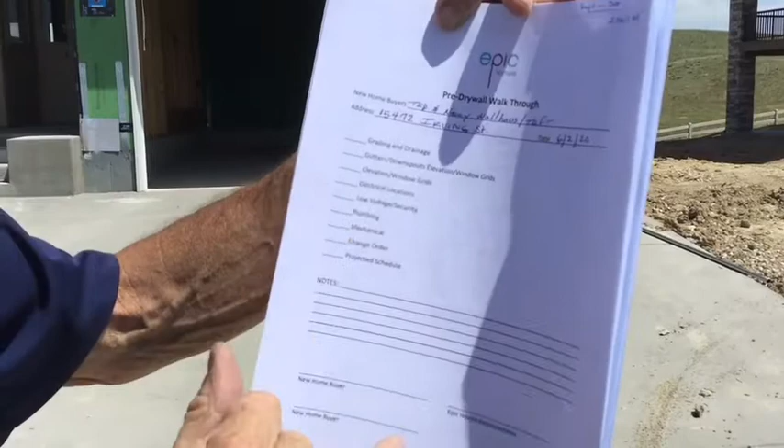Something happens in every house every day, so today what's happening in your house is the pre-drywall video. I have this little checklist that we use, and we're going to be talking about many things today: grading and drainage, gutters and downspouts, elevations, window grids, electrical, low volt, plumbing, mechanical, change orders, and then the projected schedule. So we'll be covering these areas.

We have the siding installed, and after inspections this week, we'll be starting the masonry work, the stucco and the stone. Now that may not happen exactly next week - there's a couple of houses in sequence ahead of yours, but within the next 2 weeks we'll be setting scaffolding to do all of the stucco and stonework on the exterior.

As you can see on the exterior, anything that still has the green cladding or green board is our wall sheathing, where we have yet to install any masonry product, whether it's stone or stucco. We leave every soffit open, everything open, for the inspectors to see every bit of wiring, framing connectors, draft stopping, making sure I get all exterior penetration sealed. So there's several areas still open, but that all happens in correct sequence, along with and in front of and behind the masonry applications.

So here we are, modern prairie elevation. You've got 3 garage windows on the single bay, the entryway, and on the modern prairie elevation there are no window grids. This being the exterior of a modern prairie elevation, I'm going to pull the garage door down so you can get a sense for what the front facade and the windows look like in the garage.

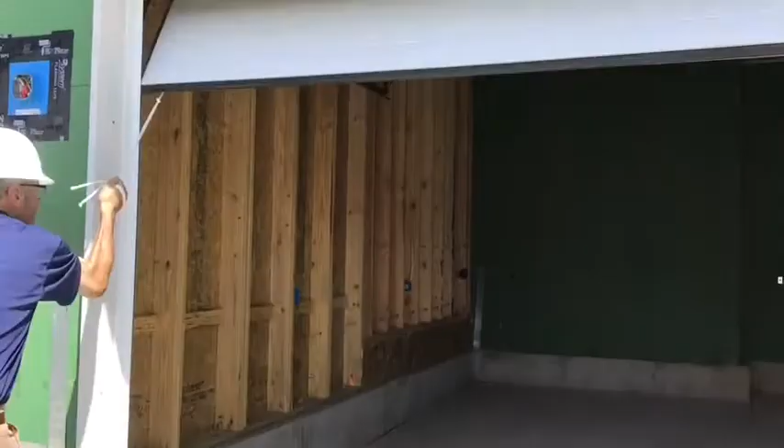These are the garage doors for the modern prairie. There are no grids in the garage door windows either.

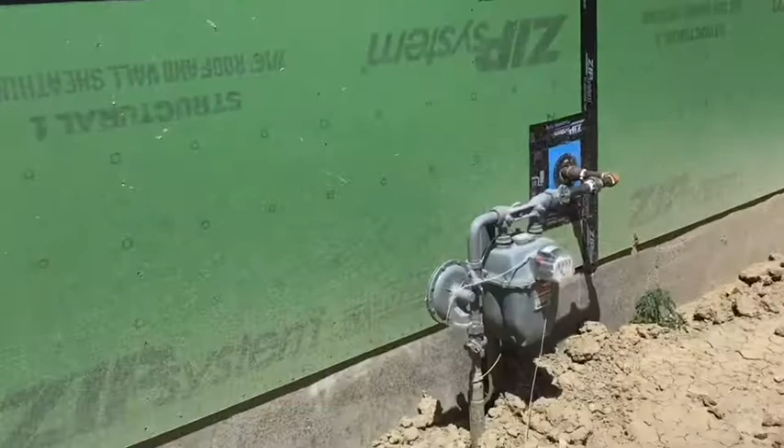So as we move around the outside to the south side of your home, the garage side, you come down and can see everywhere that's green, like I mentioned, will be masonry, whether it's stone or stucco. This is our main gas meter, gas going into the garage - we'll show you that in a few minutes. We come down this side of the house.

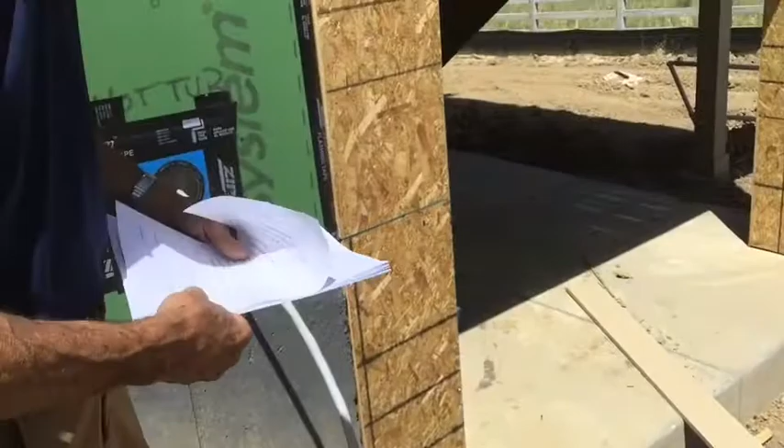Got a hose bib located here, and this is a bedroom window in the basement. We have a 110 outlet here for your request, and then this is the hot tub pre-wire, which if you're going to put it on the patio, that'll connect right to this disconnect that we mount here. We've got a retaining wall built and installed here, and that's to provide required drainage.

Something I failed to mention up front is this is a picture of the plot plan, and it has all kinds of information on here, but it shows the footprint of your house, the outside of the foundation, and the retaining wall right here, which I'd hope Craig had talked to you about at contract and given you a copy of. If you have not gotten a copy, please request one and we'll get it to you immediately, whether Craig or Kyle sends it. And if there's any other documents you need, please just ask.

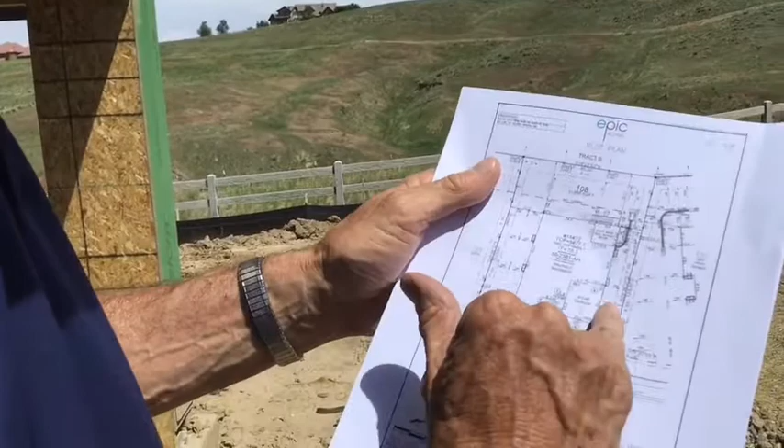This also provides us with directional arrows on how the drainage is going to work on your lot. You can see in the rear here, all drainage is designed to go to the back fence line and off into the open space. Off the sides of the houses, we have to maintain the drainage percentage of slopes that are stipulated, and those will be certified at the end of the construction period. This is your lot perimeter, your house footprint, and all kinds of drainage dimensions and slopes of grade that we need to maintain.

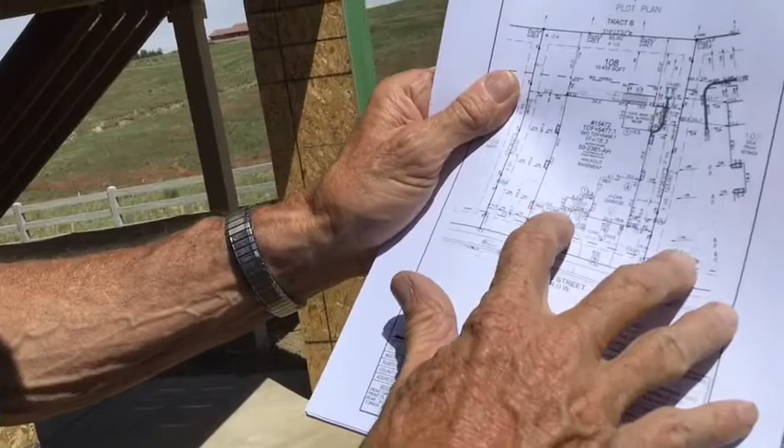This little stop sign figure that you see on your plot plan represents the number of steps into and out of the house. For example, at the front porch we're coming up 3 steps, and then there's 1 step into the front entry. From the 2-car garage, there's 4 steps up into the owner's entry. In the 1-car garage, there's 3 steps up into the owner's entry. At the rear, you step down 1 step to the patio, up to the deck, and then there's 17 steps from the upper deck down to lower grade.

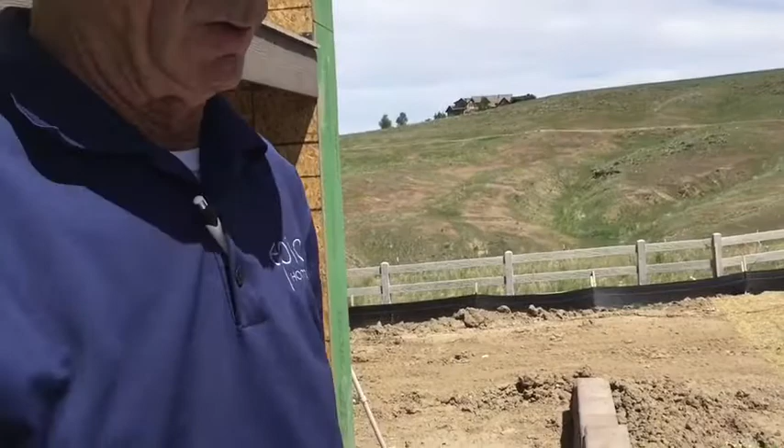So this will give you an idea here. Once we move around, we'll give you a panoramic shot of the rear yard so you can see how that's shaping out. Now, I'm not fine graded yet. After I do all the masonry work is when we move to fine grading, so I'll get all the masonry completed first, and then we'll move to grading.

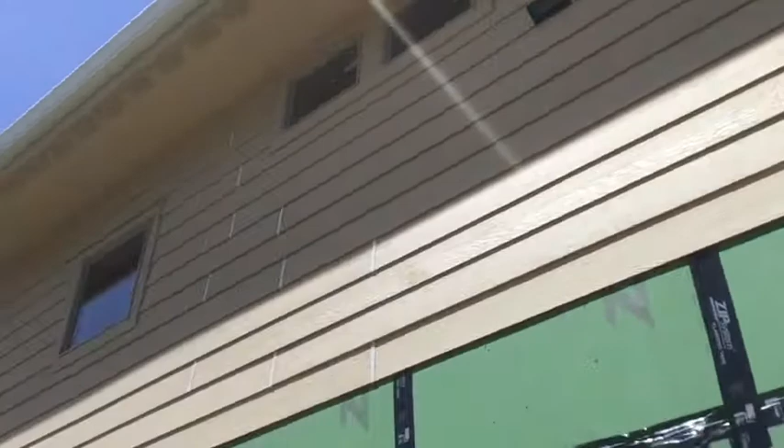So as we come around the rear of the house, on this back corner, pardon me, looking at your electrical drawing, which is a little bit hard to read. I also have the low volt drawings here once we get into the house. On this back corner, per your request, we've added that hot tub pre-wire. We've also added a 110 outlet in a box up in the deck above, and I'll show you that in a moment -- it's on a switch from the inside, which I'll point out when we get there.

As you move around down this retaining wall, you can see this provides a little bit of a nice secluded area down to your patio. Good planting area.

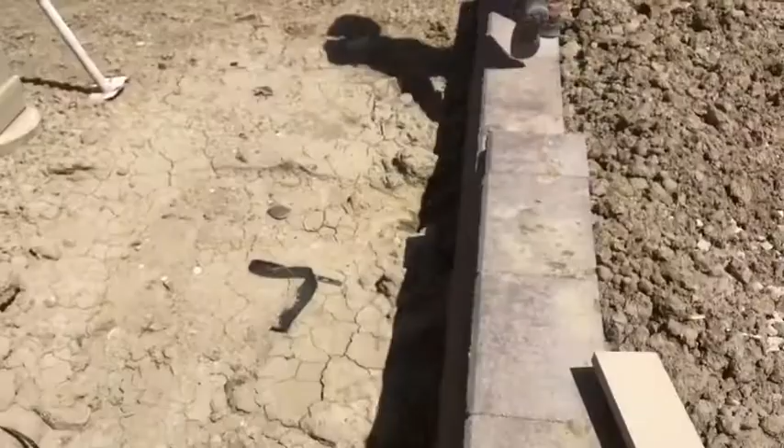This view here will show you a pretty good panoramic view of your rear yard. Once I get things graded up to concrete elevation, this is a pretty gently sloping backyard, very usable, and it all drains back to the fence line.

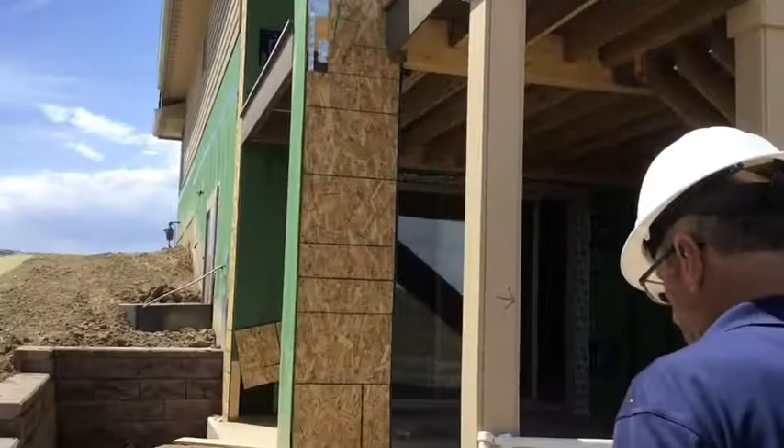So looking at the rear of your home, this is the back patio on the lower level. Got our deck supports, deck stair supports here. I'm going to move on to the patio. As I mentioned, we still have everything open here. Our columns are still open for inspection purposes.

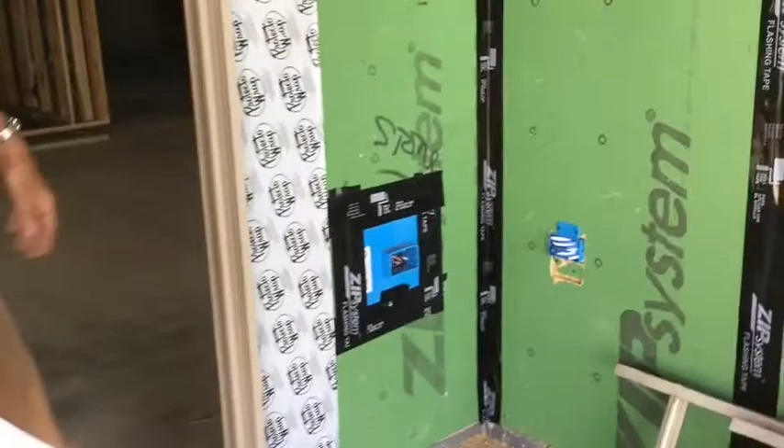This is the switched outlet you've requested up under the deck -- that's what this is right here in this deck ceiling. It goes into the house and into the sub panel. On this side of the patio door, we have a waterproof outlet. We also have a coach light that goes here.

From a low volt standpoint, as I pull this open, bear with me, you've requested -- this is what the low volt menu looks like, which I'm sure you were very much involved in.

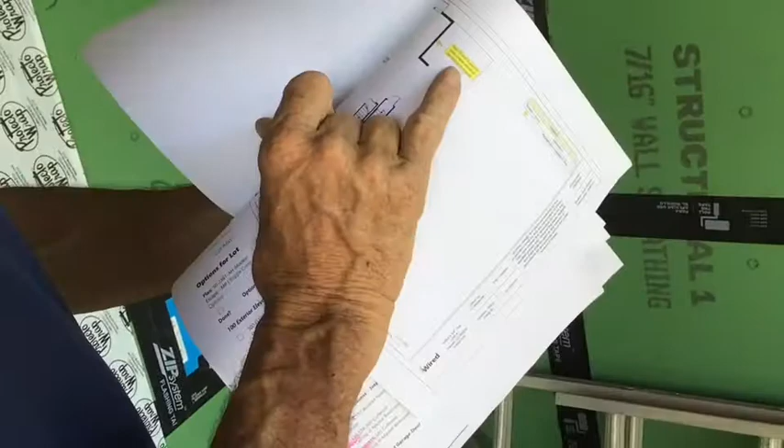So I go to the basement level, and we placed a CP next to the electrical box. This is the best location to put that here. So that's the CP location, and the CP is the phone and data cable satellite port -- that's what that port there is. So as we move off of the rear patio, we'll move around to the rear of the house.

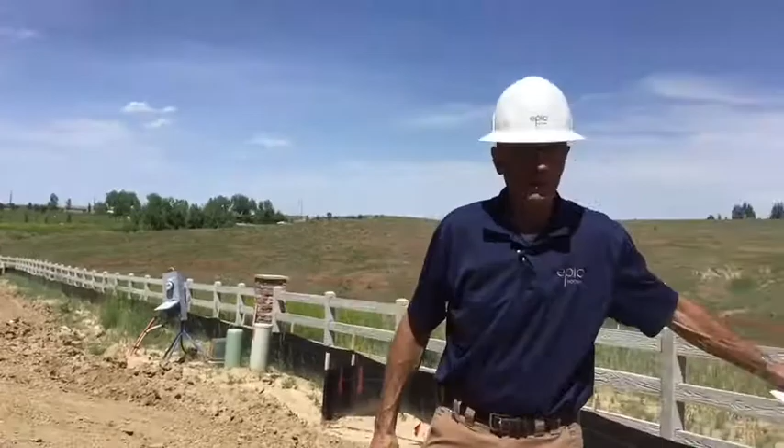If we look at the rear elevation here, as I mentioned earlier, everything that's green will be stone and or stucco. Down below, next to the patio doors, this whole wall is masonry, and the deck is all masonry application as well. You can see everything is open, our soffits, the lighting, and we'll look at that lighting and other items when we get up there. This being the rear elevation.

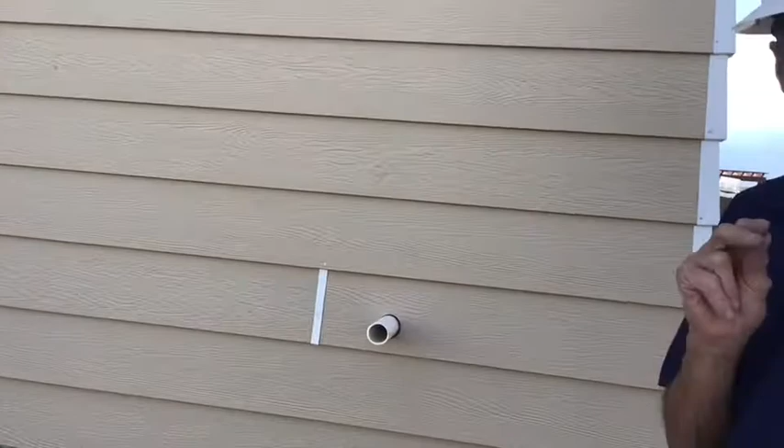This pipe sticking out of the wall here - on walkout lots, which have a walkout basement, we installed 2 sump pumps. One high in the unfinished portion of the basement, and one down low - high on lot and low on lot. We provide and install a complete interior perimeter drain system, to collect any percolating water that may come up through the ground, or any precipitation that soaks into the ground that may get down to the footing elevation.

Inside, underneath the concrete slab, we have a drain system, and we have a sump pit at the low point and pump installed in the low point and in the high point of the basement. I'll point those both out to you when we get inside. But this is the ejection pipe for the low sump pump.

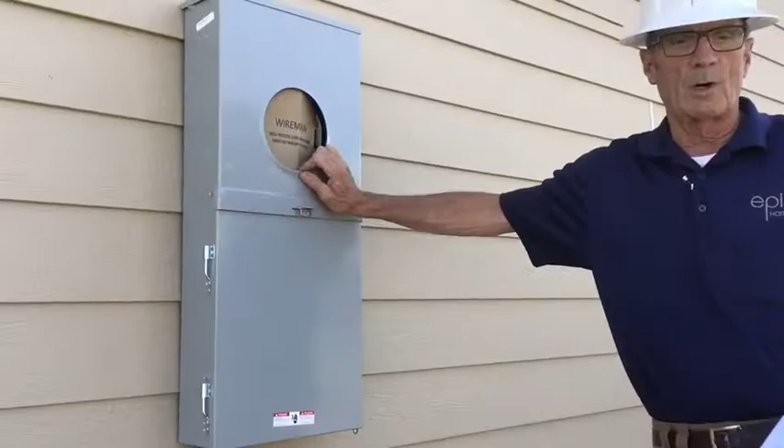Then here we are on the north side, which is the main electrical service disconnect. Now you've opted for an interior load center, and I'll show you that when we get into the basement. But in the exterior loads and into the exterior meter panel, we've got what I fondly refer to as the heavies - your air conditioning disconnects may be here, some other high voltage, the main feed to the sub panel, a couple other miscellaneous breakers will be in this panel, but it's mainly the heavies. Then everything for the house will be in that sub panel in the basement.

This is low volt termination coming out of the house. This is low volt pre-wire underground from Comcast, Excel, CenturyLink, whoever your service provider may be. There's conduit under the ground to come from the rear feed pedestals, and then there'll be a disconnect placed here, called a demarc, and everything - telephone, cable, satellite - will terminate here, and your main connections will connect outside here. Then we have a sub panel inside for your low volt, which I'll show you in a bit.

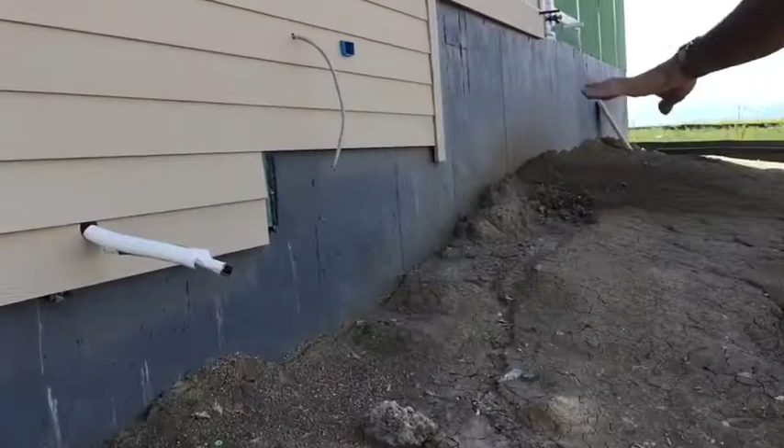Other items on this north face - as you can see, we're coming up the walkout basement. This is a window going into the rec room. This is where the air conditioning unit sits, so this is the condensate lines for the air conditioner. This is the power and a service outlet for the air conditioning service area. You can point down into the window well.

In every area in a basement or in a walkout, we do provide a drain in that window well, so that if any moisture or water would ever fill up in there, it'd go into the pipe, into the interior drain system, to the sump pit, and then it would eject out of the sump pump.

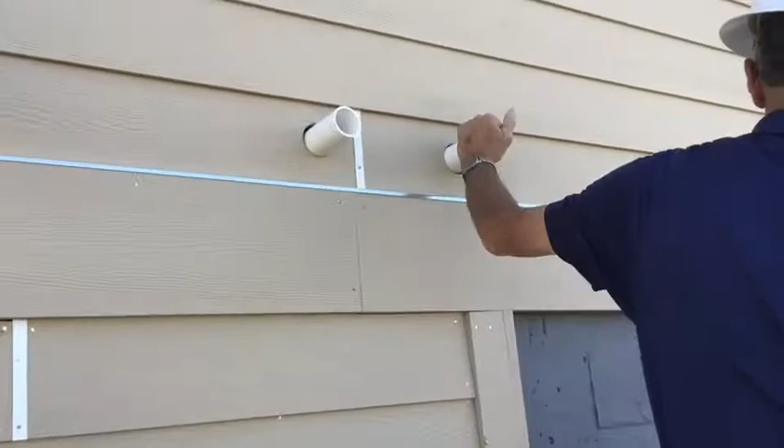So this side of the home, these penetrations here are our furnace intake and exhaust, water heater intake and exhaust. We've got an irrigation sprinkler tee here. This copper pipe is for - we'll be installing a vacuum breaker.

And as you are aware, we provide front yard landscaping. So right below this vacuum breaker location, all of the valves for the sprinkler system will be installed in the ground to service the front yard. The valve box is large enough to accommodate additional zones and valves for rear yard irrigation, so everything will be set up for the front yard with room for expansion in the zone box.

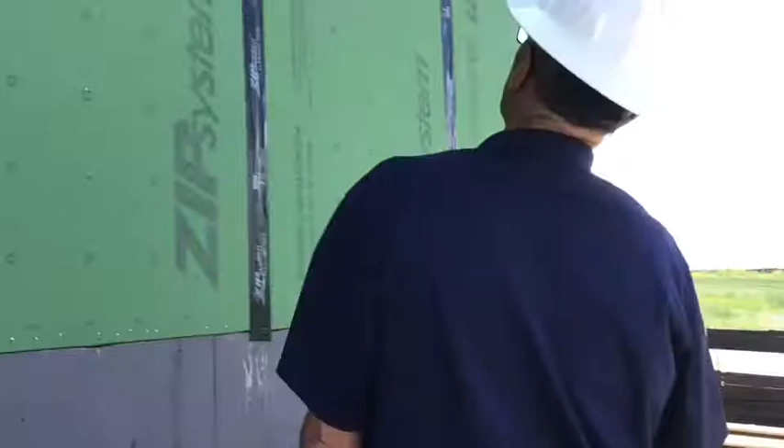Hose bib, front hose bib. This is the front ejection pipe for the uphill sump pump, so we'll look at that when we get inside as well. That's pretty much the extent of the north face. You can see up in front we've got downspouts.

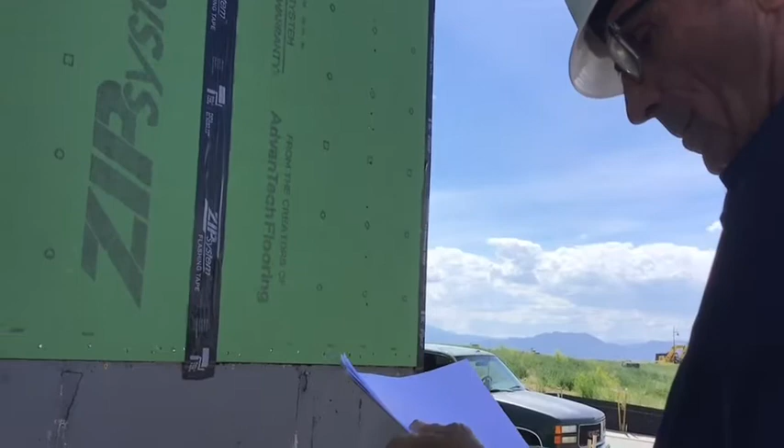As we move back around to the front of the single bay garage, you see on this corner of the garage is another downspout, which will come right down the corner and come out into the landscape, the rock area of the landscape.

So that pretty much covers the outside. You can see these are called quick flashes - these are where the coach light will go on either side of the two-stall garage, and then on this side of the single-stall garage. As we come into the single-stall garage,

we're pretty much finished with everything. Now we've got outlets around each wall. You've also requested in this garage 2 additional 110 outlets. This is your add-on. You've also requested low volt in here.

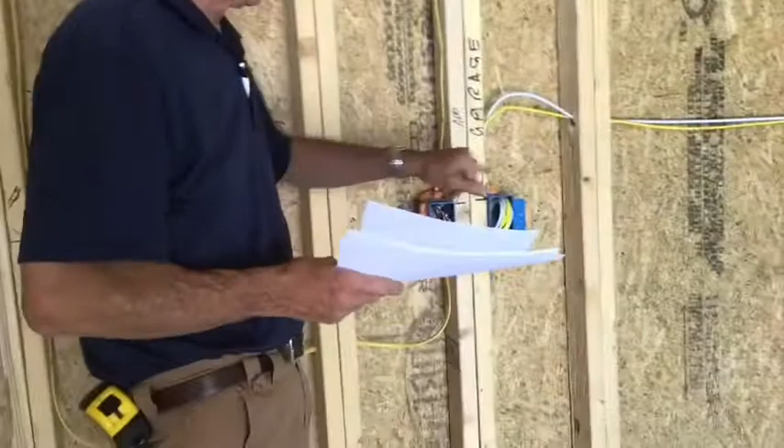I call it the right thing, a CP - and a CP again is a phone, data, and cable satellite port. We've got this outlet here, which is a standard outlet. This is where the irrigation clock for the landscaping will be placed. And I'm going to mark on the wall here that this is irrigation, just so others know - IR for irrigation.

On this wall is an additional added outlet that you've requested, and our standard outlet. So we've got two outlets on this study wall, or interior master bath B wall. On the outside wall, additional circuit. Up on the ceiling, we have a ceiling light. We have a garage door opener pre-wire, the low volt for the sensors down by the door, also a power outlet to plug a garage door opener into.

From the owner's entry from the single stall, there's just a single switch inside, and that's for the interior light as you enter.

I'm going to open up the big garage door. This is the front entry. What we have at the front entry are recessed cans in the ceiling, there are 3, 1, 2, 3. We have a power source on the front porch, a waterproof outlet, and these are controlled inside, I'll talk about that in a minute. Right here, always on every house, this is the doorbell location. Whether you install a Ring, we'll just have a push button there for a standard doorbell.

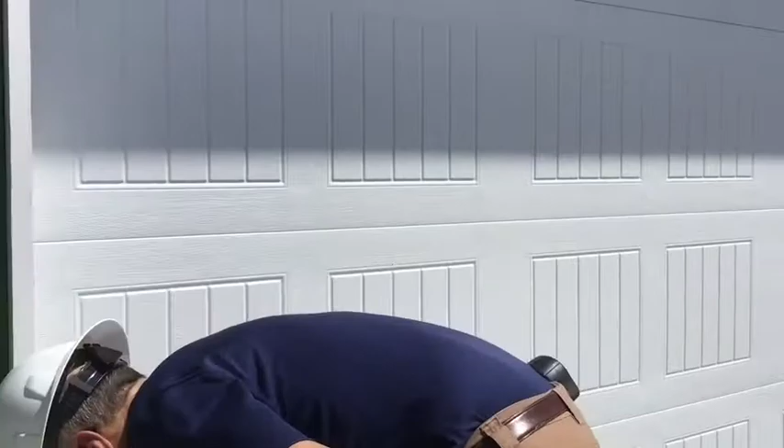And we'll open up the 2-car garage. Okay, as we enter the 2-car garage, an option you requested is we've got a 220 40 amp circuit here for a car charger. This was a location that Craig gave me this week, so that's where that is located. We got this wire cut to length, so if we needed to move it, it would only be shorter to the panel, I can't go any further away from the panel. Hopefully this will be in the correct location for your car.

You see we got the gas main boxed in. This is standard service outlet. This is what's called the CEE, or a UFER ground. CEE stands for concrete encased electrode, and that's a piece of rebar which goes all the way down through the foundation to the footing. We have 2 means of grounding our electrical system or your house. One, this comes all the way from the house panel, and we ground to the CEE. Another is we have a bonding ground on the water line, on the underground water line, and I'll show you that when we get to the basement.

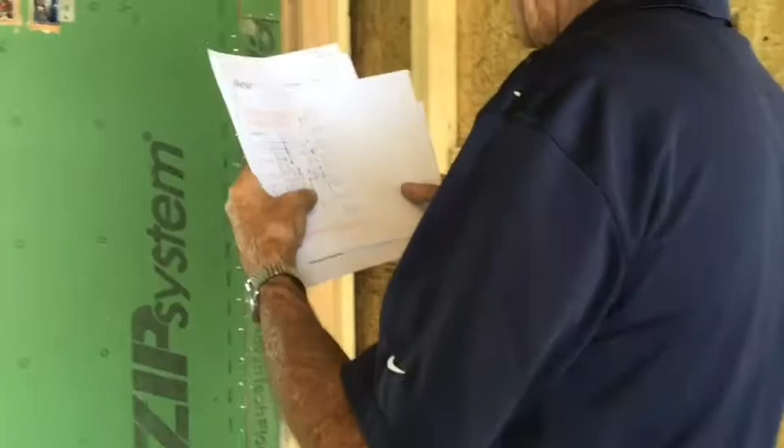Other additional electrical items in the 2-car garage. Bear with me, this is difficult to read. We got an add-on dedicated circuit right here. We've got switches up on the wall, which I'll speak to in a moment. We had the outlet located here, we moved it to the side wall. This is our standard outlet. We also moved the standard switch, so we've got a 110 dedicated. We moved the standard to the side wall. And then we've added the car charger.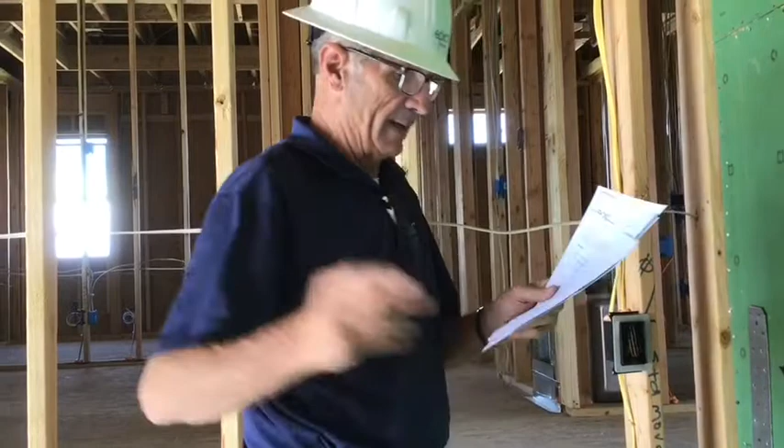Also, I missed as we walked by, I've got another switched holiday circuit in the eave right outside this 2-car garage, and I'll show you that switching in a moment. Right out here in the eave around the corner is the switched holiday circuit. You can also see a downspout location which will come out of the gutter, off to the wall, down, and off to the side yard.

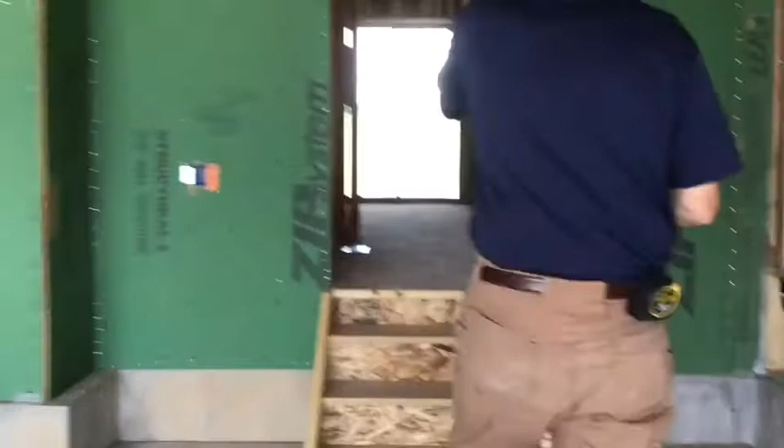You've requested that we move our standard switches from this side to this side, and we've done that. See my name there, that's the electrician reminding himself to talk to me about it. So we've got coach lights, outside coach lights on the garages, those are on a three-way, and I'll show you that at the front entry. We've got two lights in the garage, and then we have the holiday circuit switch separated. So again, in the garage, same as the single stall, up in the ceiling, we've got two lights in the two car. We've got a power outlet and low volt wires going down for the garage door opener.

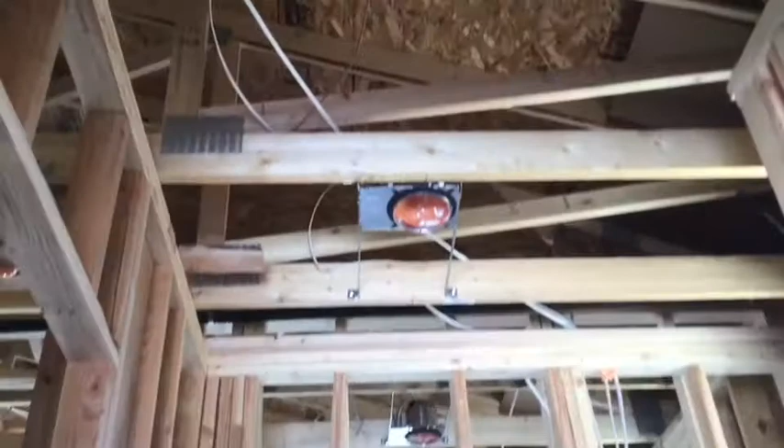So we call this the owner's entry. As you come into the owner's entry, the door will swing open. You've got a switch right here ahead of yourself to turn what I call traveling lights on ahead as you're walking. So we have a closet here off to the right, we've got a pantry to the left. Inside the pantry there's a switch with a recessed can.

So we've got lights on ahead of ourselves. As we're leaving the owner's entry, two light switches on this wall right here. One is to turn off lights behind yourself, the other is to turn on the traveling recessed cans ahead of yourself as you move into the kitchen area.

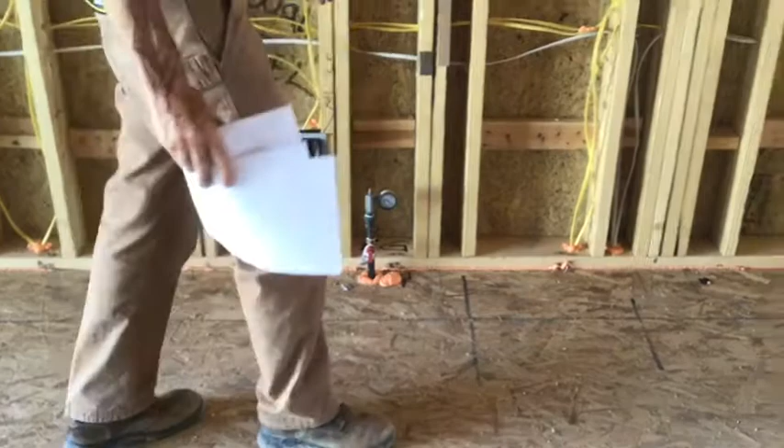So here we are in the kitchen, and we got a lot going on in here. First of all, we're just going to talk about standard kitchen layout, this being the big wall here. On this wall, we've got the range hood here, this is the power for the range hood. We've got gas, 220 and 110. You have a dual fuel range, which we've accommodated. These are all outlets, horizontal per your request, these are all standard outlets. We've got a micro with a combination micro and oven here. All the outlets are 38 inches above finished floor, horizontal.

You must have a tile backsplash. Low volt, we have, on this wall, two what are called unis, and those are dual phone data and cable satellite ports. So we've got that uni here, PH6.

Oh, I misspoke, I apologize. We only have a T1, which is the phone and data port. The unis are on the other side, sorry about that.

So we also have under cabinet lighting in here, and we've got low volt under cabinet lighting. Underneath the kitchen sink, we've run all of our high voltage, and that's where the main J boxes and controllers will be for the optional low volt lighting. So we'll be finishing up that low volt lighting tomorrow.

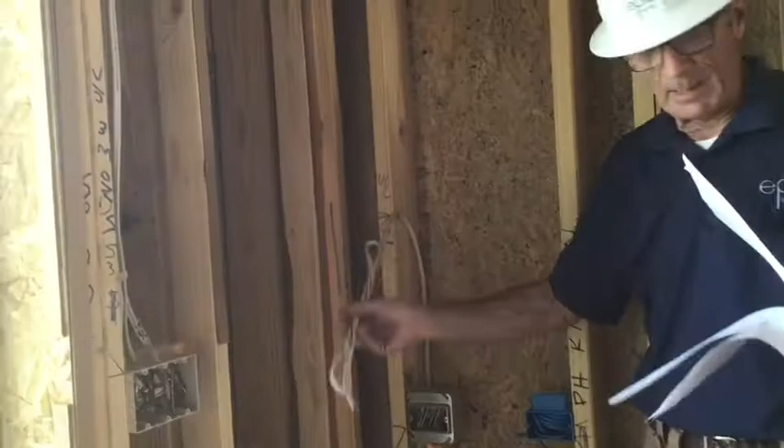The under cabinet lights, now you've requested in very specific locations, and we are prepared for that. We've got high voltage here for under cabinet lights on this end. The locations you requested for under cabinet lights are here, next to each side of the range, and all the way over to this side here. Everywhere we can get under cabinet lighting on this wall, we will.

The other under cabinet lighting is next to the refrigerator. This is the refrigeration spot. We've got water, power, above counter here, and then the under cabinet lighting circuit.

Let me look for other options in here before we move to standard features. You've requested two pendants only. We have located those. We have split the island in three, and we have two pendants here over this large countertop that's here. We also have recessed cans in the ceiling.

There's one centered over the kitchen sink, one centered just off of the range, which is in line with the kitchen sink. And 9 recessed cans in here.

Some are travelers for the hallway. There's a 4-way switch over by the stairs to turn off behind yourself, and another switch for the other recessed cans. So coming back and looking at this kitchen from this side, I'm going to stand at your kitchen sink location. So say I'm standing at your kitchen sink, and that is right here.

So our pendants are located out here, and they will be short of that countertop overhang. I've got some lines drawn on the floor, which were from when we were discussing where to hang your dining fixture, I was drawing some diagrams on the floor. But we've got 2 pendants,

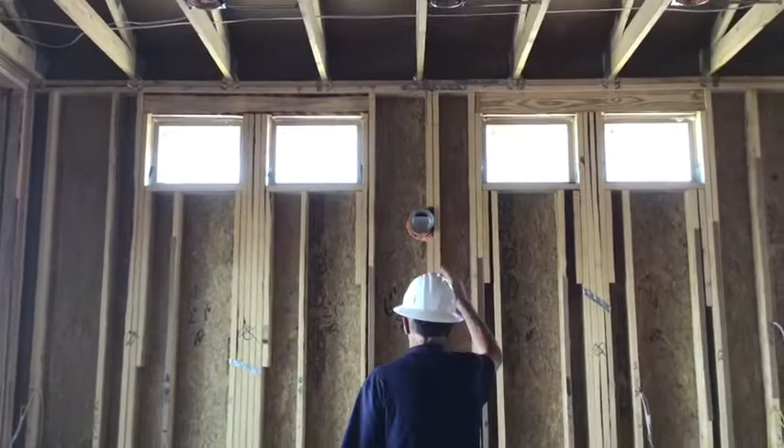centered in 3. Behind us, or above us, we've got recessed can over the workspace, recessed can just behind the workspace at the range, recessed cans on each side, and then on each side of the island as well.

This is the plumbing for the island. The cabinet backs up to here. The countertop goes out and overhangs 12 to 16 inches. We've got power circuits around the island, 2 on the main face, 1 on this end, and 1 on this end. So that anything you're doing on this countertop or around, you'll have power source available to you.

Inside of the kitchen sink base will be the disposal switch as well. That's where your garbage disposal will be operated from. So all of our wires for the low volt and high volt are in the dead space of the island.

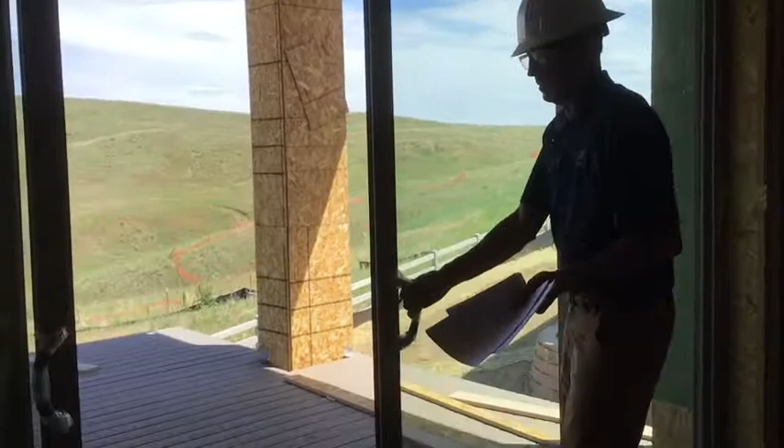As we move to the patio door, we've got a 12-foot wide, double open center meet door, which is very nice. Opens this up to the outside. Next to the door are switches. What we have here are, you can operate kitchen lights on a 3-way. So as you're coming through, you can turn them on or off.

Cans, I've got outside recessed cans in the soffit. And we have a circuit up high per your request at the outdoor room. That is a switch circuit up there.

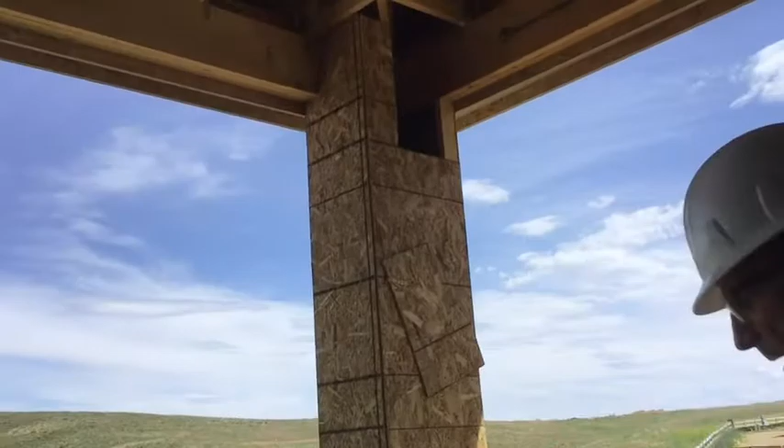Also on this deck, this is our gas barbecue location on this column. This will be a stone column. And on this side we have power, plus you have requested from low volt on this corner a CP, which is phone, data, cable, and satellite. That's what this is here. So we got power and the CP location.

So as you see in the soffit, we've got 4 recessed cans, and we've got the switch outlet up high per your request.

I'm just going to stand back so you can see, get a view looking outside the kitchen off of the deck. Come around this way, right? Give you a good view of what you'll be encountering, what you'll be looking at.

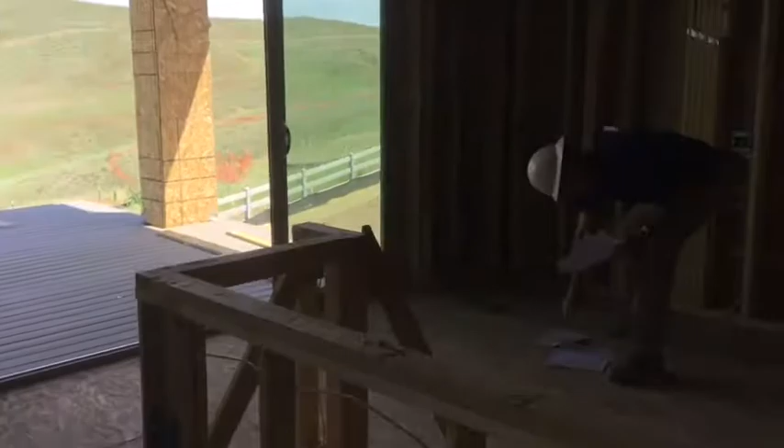Okay, on the refrigerator side, we've got refrigerator, then we've got countertop with under cabinet lighting. I've got 4 switches over here above this countertop. And what we've got here, this is where your pendants are switched. Also, I believe per your request, this is where we have the under cabinet lighting switched.

We've got 2 switches separated. They are separated per your request on that under cabinet lighting. LED strip lighting beneath the upper cabinets, correct. They are on 2 switches located here. So 2 are for under cabinet lights.

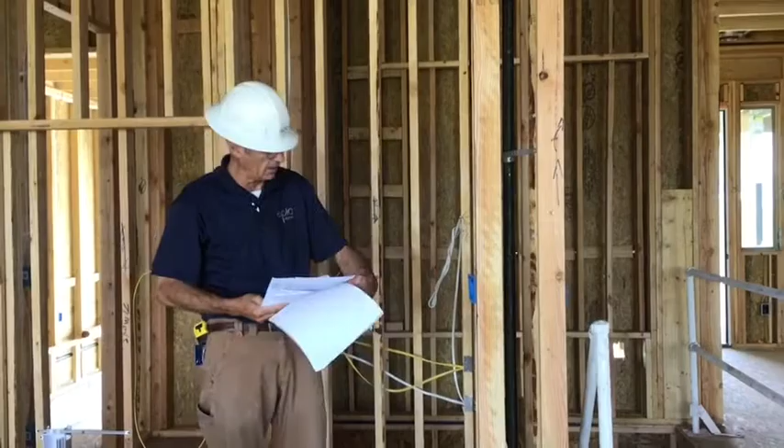We've got traveling cans behind yourself. We've got recessed cans. And then a 3-way for the kitchen for the traveling, to turn off behind yourself. So 4 switches on this wall here.

Now here we are at the great room. We're going to pause the video and we're going to move to the front entry, and we'll look at everything coming forward from the front entry.